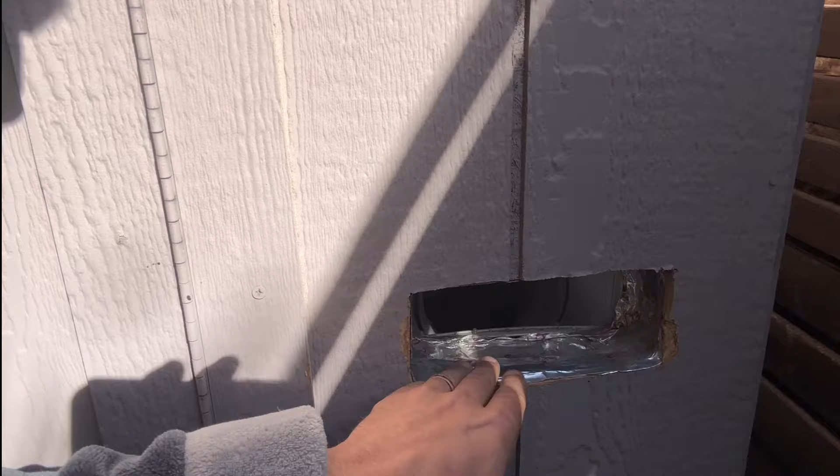So that AC has a vent, obviously it has a vent going to the outside. Now check it out, I got a hole right here. I just put some kind of thermal tape right here and made it so it doesn't leak as much as I can. But I'm gonna do a vent on the outside here. I want to see if it works.

And I learned something from Slant 3D, shout out to Slant 3D, see it on the screen right now. He did something where they did the vents, but the holes were kind of not straight, and I want to do that. I don't know where to look on this camera, I was looking at the other side, so I'm sorry about that.

But I want to do it so the holes aren't straight, so the light doesn't let light through and it just looks cleaner. But we'll try and design something up, see how it works, and see if it functions okay and lets the air through good. It can't back up air, it's got to let it through nice and easy. So let's see if we can't design something cool and probably something unique to 3D printing. All right, here we go.

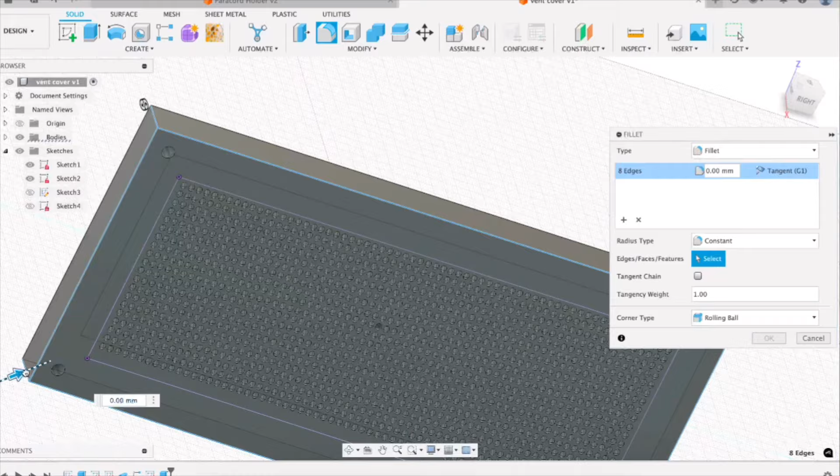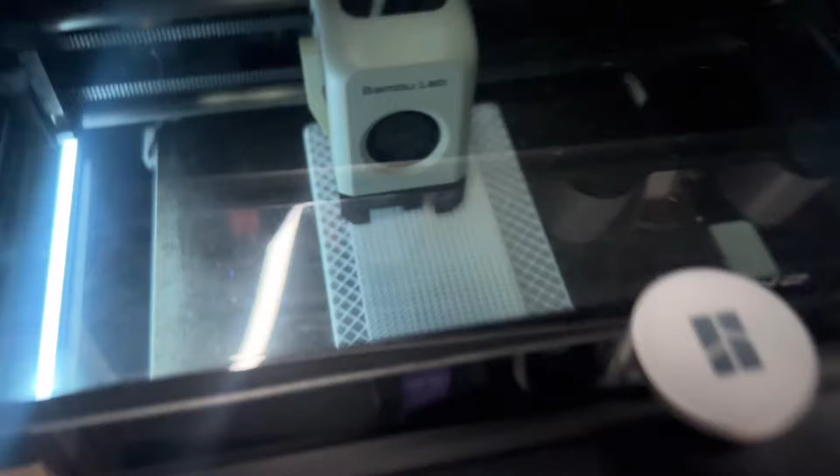I'm not entirely sure those holes are big enough. Man, it's almost a 24-hour print, it's crazy.

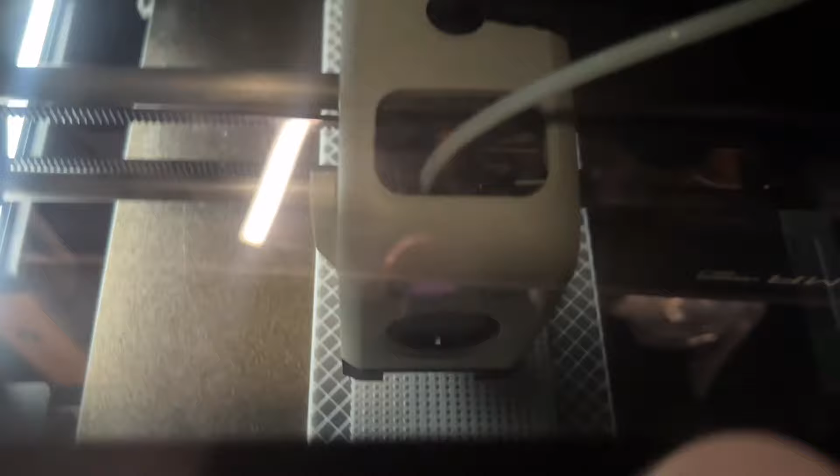It's pretty cool, I gotta admit, I do like that pattern a lot. But I'm not sure if it's gonna be enough holes, we'll just have to see. Are the holes big enough? I think so, but I'd say maybe that's a quarter of the way filled, you know, air-wise, maybe 33%, something like that, a third.

So imagine that was shrunken down to a third size with a little bit of air moving restriction, if that would work, we'll have to see. But I've got another, let's see how long, 16 hours and 26 minutes to think about whether or not that'll work. So this is going to take a long time to print this prototype.